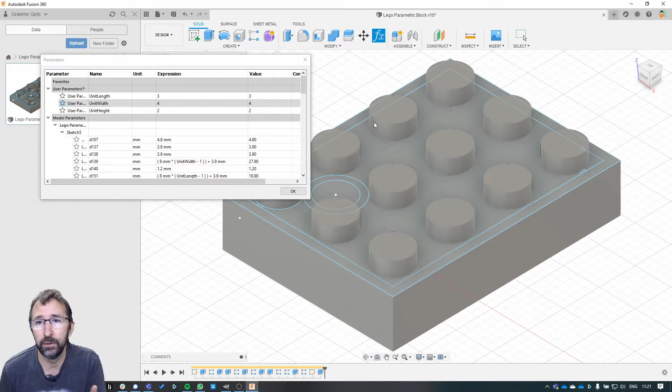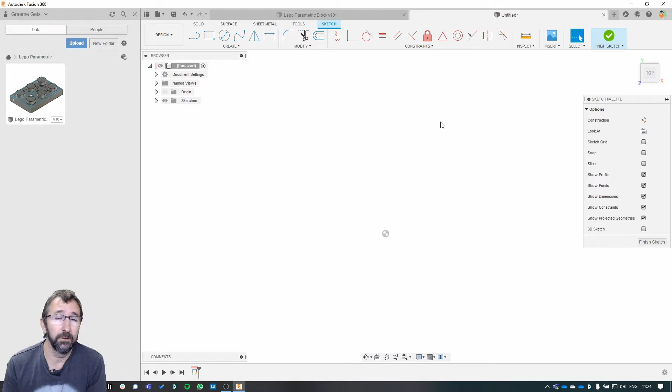So we'll start off with a new design, and as always, a sketch. So first, dimensions. I did some searching on the internet to see what dimensions people had done, and there's, as you can imagine, lots of them, some accurate, some not so accurate, some rounded up. But the one I liked the most, which was the easiest to work with, was this one by Christoph down in New Zealand. And he put together, also in Fusion 360, these drawings and dimensions.

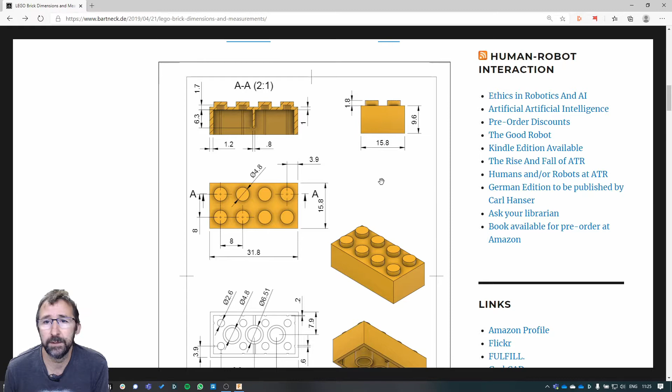So dimensions are fairly simple. We've got the stud at the top here is 1.8 mm. We've got a full-length brick at 9.6, and a platform, or at least a base, at 3.2, so a unit height is 3.2. We've got a dimension of 3.9 millimeters between the center of the stud and the edges of the wall, and 8 millimeters between studs.

If you notice here, the brick length is 15.8 and 31.8, and that 0.2 millimeter really is a 0.2 millimeter gap between bricks, so you've got to have that in. So what I learned largely about doing this one, which I'd failed in my original design, is how to do the dimensions so that when the brick grows, you still maintain that 0.2 millimeter gap between bricks.

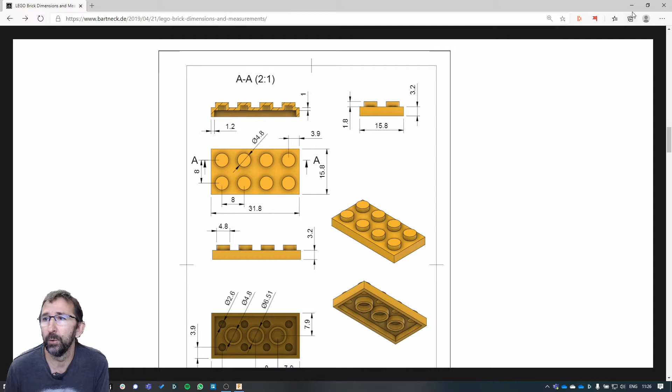And I found the best way to do that is to take one stud and anchor that in one place, and this wall and that wall, and anchor that, and everything else grows out from there, and the calculations work out. So let's go from there. We're going to start off with the stud. This stud over here is going to be my anchor, and it's a 4.8 millimeter diameter. So create a circle, 4.8 millimeter. Okay, first stud in place.

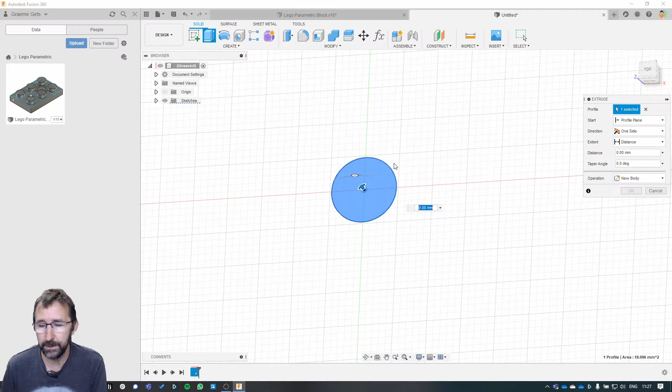So I'm going to start off with extruding that, and that is going to be 1.8 millimeter. And I'm just going to try and remember to name all these things so that I can refer back to them in the parametrics. Stud extrude. All right, so there's our first stud.

Now the next thing I'm going to do is set up the user parameters, and we only need 3. We need a unit length. It doesn't have a particular unit, it is a unit, and I'm going to design it as a 2x2 because it makes it a bit easier to work with. This is a unit. So by unit here, I'm talking about the number of studs in the block.

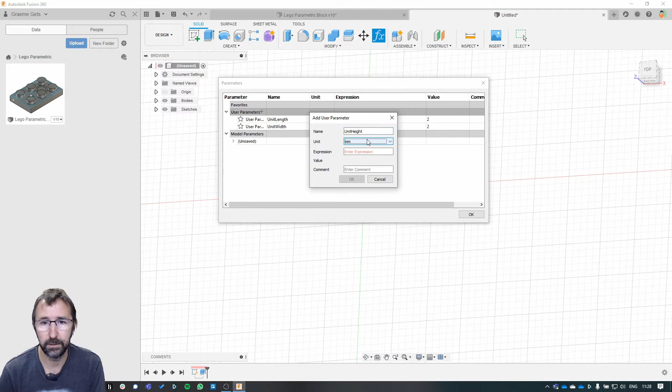To there. Unit height. Again, no units on that, and it is 1. Okay, so that gives us our start. So first thing to do then is to create the pattern.

Now I've got these pinned up here, but if they're not there on yours, if you go down to pattern, rectangular pattern, and then there's these three dots, which is the menu, and you can pin it to the toolbar. So I've done that for the pattern and the parametrics, just to make life a little bit easier.

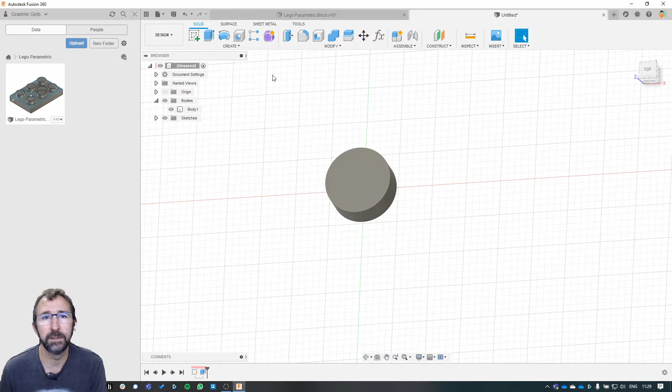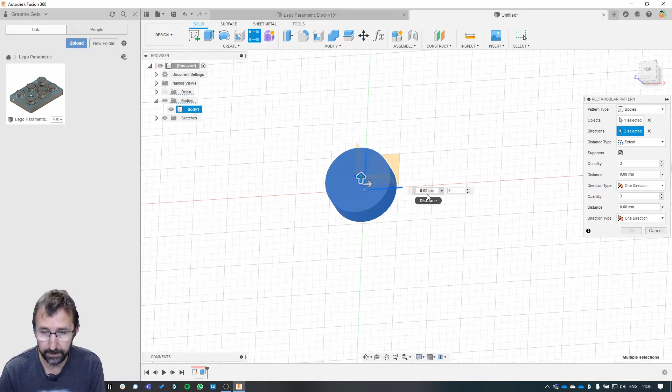So first thing, I'm going to do a body. That's the body I'm doing. Directions, I'm going to choose that orientation of the axis, and that way, and then we're doing up. So I know from the design that it's 8mm between studs, and this is going to be the unit width. The vertical line is going to be width, and the horizontal this way is going to be the length.

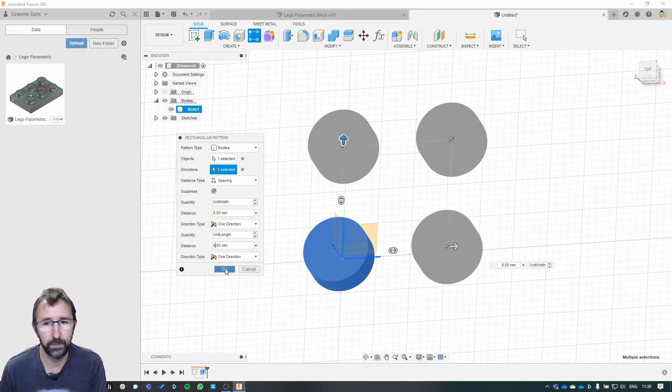Now, the distance type, this needs to be set to spacing because it's the 8mm spacing between the studs that we're concerned about here. And for the other way, it's going to be the same thing, but that is going to be the unit length. So you can see how it brings up the parameters that I've got in there as you type, which is quite useful. And 8mm for that as well. There we go. So that gives us our first part of the Lego block.

The next thing we need to do is the inside support, this bit here. So these are the bits underneath that the studs lock into. And again, this is pretty simple. It's a 6.51 diameter, inner diameter 4.8. Now, I generally make that a bit bigger to handle the shrinkage, especially with that small diameter, so that the studs actually do fit in. But generally, you don't really need that. It's this diameter, the 6.51, that's actually more important.

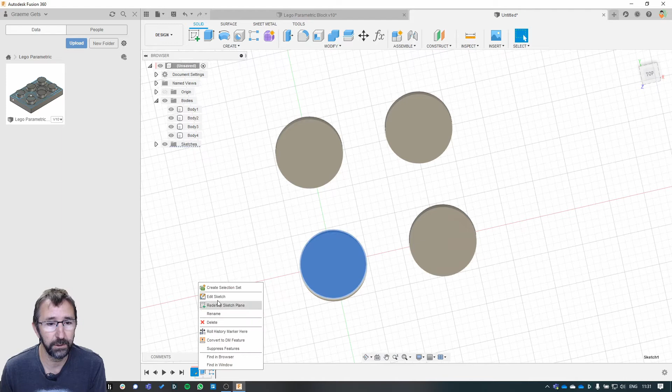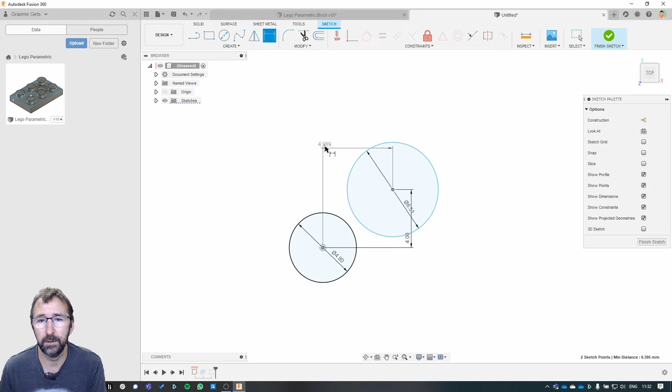So this becomes fairly easy as well. These are also 8mm between, and these are 8mm between. So if we're putting one of these in here, it's going to be half that, so that central point is going to be 4mm. Back to the sketch. Grab another circle, 6.51. And then we can put some dimension constraints in. So that was 4mm, and between there and there in that direction is 4mm. And that fits in nice and snug.

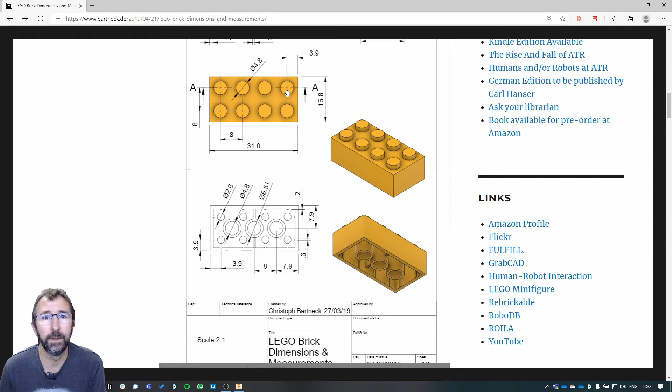Now, part of the anchoring: we've got this stud anchored to the origin, and this anchored to the stud. We now need to do the anchoring of the walls. As I said earlier, this wall here and this wall over here we're going to anchor to this stud. These ones here are the ones that are going to grow. So we go back to here. Our dimension between the center of the stud and the outside of the wall is 3.9mm. So between there and there, 3.9mm, and between there and there, 3.9mm.

Then the wall thickness is 1.2mm, so for that I'm going to do an offset, 1.2mm, and that will follow the design. Right, now we need to calculate the outside wall. It'll be the number of studs minus 1 plus this 3.9mm distance. And this 3.9 figure is important because you need a 0.2mm gap between bricks, 0.1 on one side and 0.1 on the other, and that's why this is 3.9 and not a straight 4.

So we put another dimension in there, and this we put in as a calculation. We want the unit length minus 1, multiplied by our 8mm spacing between studs. Keep the brackets in place so that everything stays right, and then add in 3.9mm. That 3.9mm is the other half, the dimension between the center of the stud and the wall. So hopefully that makes sense.

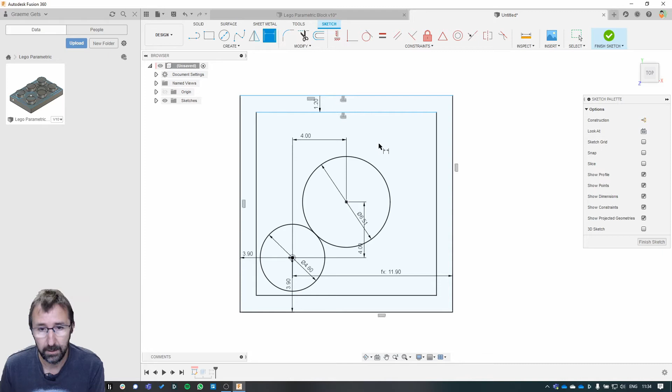And we do the same for this one, between there and the outside wall. Two brackets this time. Unit width minus 1 times 8mm minus 3.9. Oops, that definitely didn't work. What did I do wrong here?

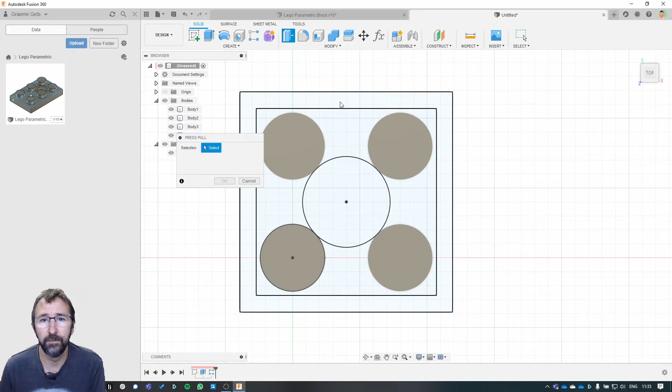That should be plus 3.9. There we go. So that looks about right. Yeah, we've got the dimensions in place. So the next thing to do is extrude it. So if I just switch the sketch on, Q for extrude. Now we're going to extrude downwards because that's the way we're going.

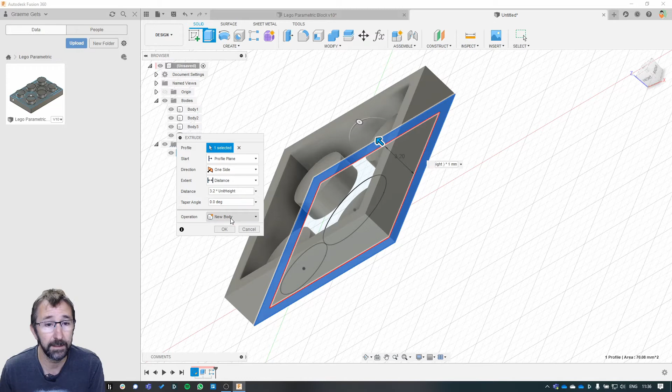And we're going to extrude. Because what did I do? I set the parameter as a 1 unit height. So we know 1 unit height is 3.2mm, so this is going to be 3.2mm multiplied by the unit height. No tapers or anything like that, and we do it as a new body. Hang on. That needs to be minus all of that to make it go down. Right, there we go. That looks a bit better.

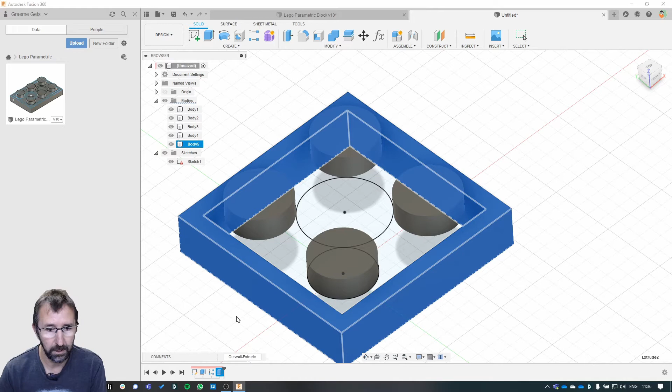Then we need to handle this inner part here. Let's rename this to outer wall extrude. Now back to the sketch, because we need the inner part of that. The inner diameter, where did we get to? Inner diameter was 4.8, but as I said, I'm going to make it a bit bigger just to handle this shrinkage. All the other dimensions I'm leaving exactly the same. I just know from printing this out that this needs to be a bit bigger. So I'm going to do that at 5mm.

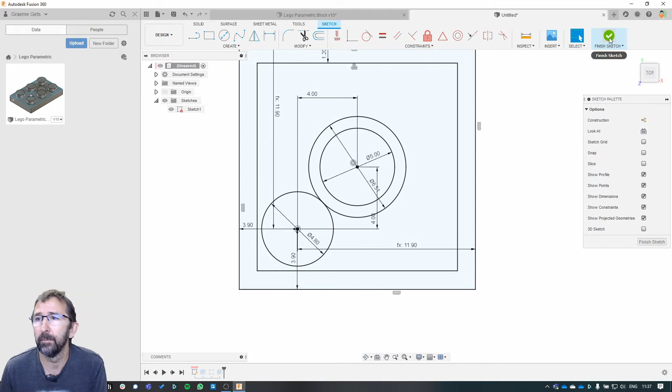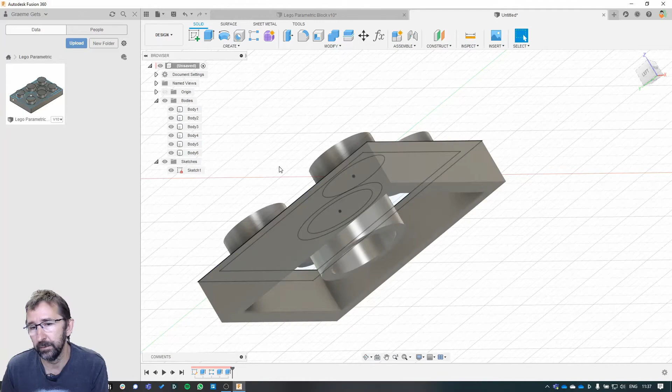Close that. Now we need to extrude it, and it's the same thing. Now I can put the formula in here as well. I can do it 1 times the unit height, or 3.2mm times the unit height. But in this case, I'm going to link it to the outside wall and do it as a new body. So every time the outside wall grows, these inside pillars will change as well. So that's looking pretty good.

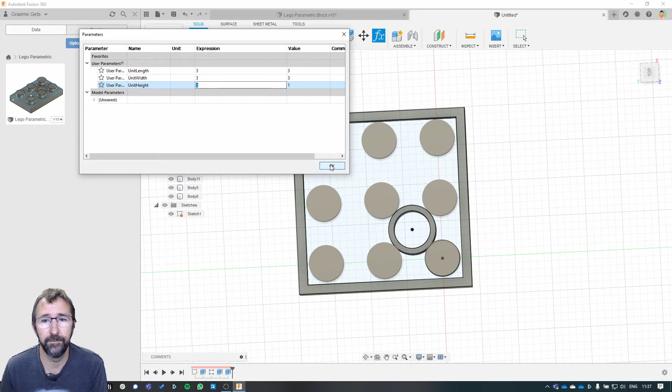Now the next thing we need to do is the pattern for this. And a quick test, always a good test. Let's change this to 3. That's looking good. 3 by 3, there we go. So what we're going to do is we're going to flip this over. Do we need to flip it over? Yeah, we can flip it over. There we go. Just so we're looking at it from the bottom. This is our anchor point now on this side because we flipped it.

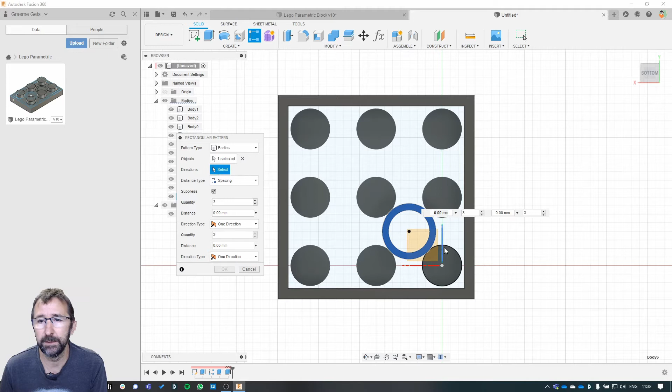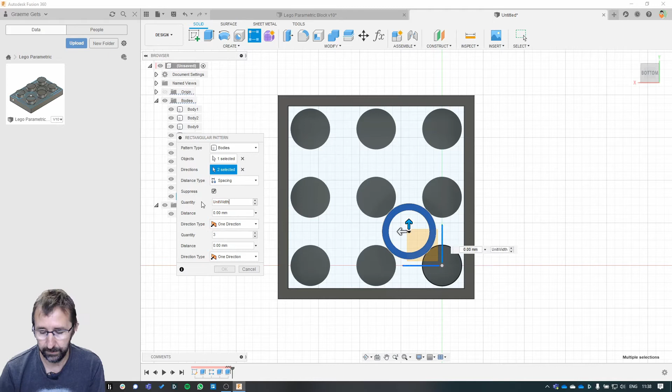And we're going to go into pattern. Again, we're going to select that body. Directions, we're going up and left in this case. It's a spacing. Quantity is going to be the number of studs minus 1 again, because we're going in between the studs, so that's going to be -1. So this is the width direction, so unit width -1, and it's 8mm, and this is going to be unit length -1 and 8mm. Okay, so that's all looking very good and nice and easy.

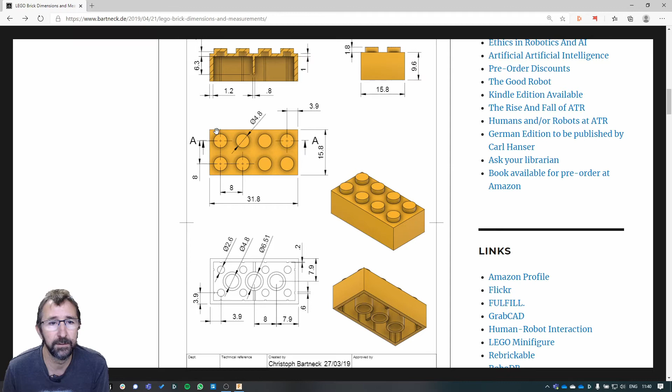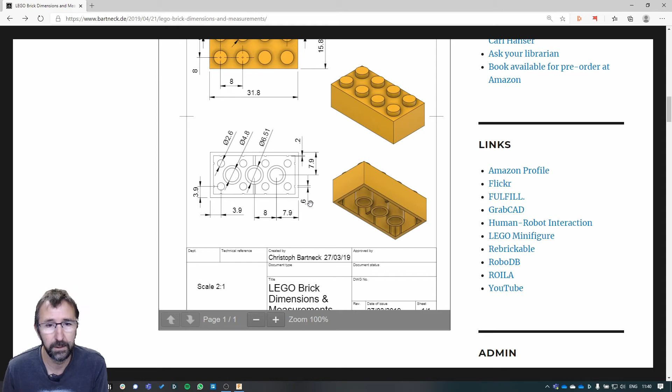The difference here with the pattern is that they only go along the inside of the outside wall, if that makes sense. Usually with a rectangular pattern, it'll do a whole rectangle. So for this one, we'll do 4 patterns for each part of the wall. And yeah. So back to the sketch. Let's turn.

Doesn't really matter, but just for my own sake. Right, so we're going to put in 2 of these. Now I'm doing this at 0.3 again, and 0.6. Again, just because this distance between here and here is actually 0.3, and it works well with the 3D print.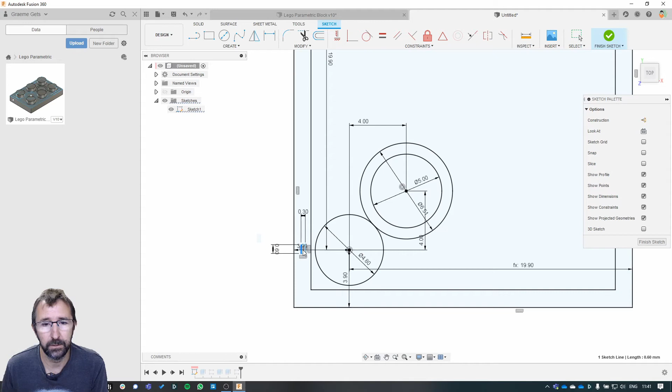So put that there. Now we can do a collinear between that one and that one, and then we need to set the dimension. So how to get this centered correctly on the midline of the stud? This is 0.6 millimeters. We know that this is 3.9 millimeters, so half of 0.6, which is the midpoint of this, minus that is 3.6. So the dimension between there and there is 3.6. There we are, and that's nicely in the middle.

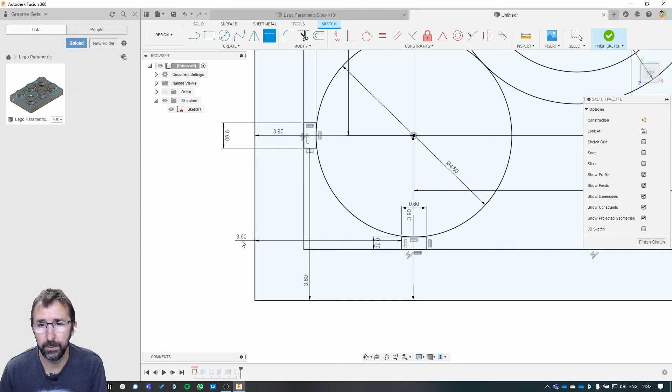Let's do this one. That is 0.3 and 0.6. Is that right? That looks a bit big. Collinear, no, that's fine. And dimension from there to there again is 3.6 millimeters. Okay, so then we will do this side. Now I'm going to do opposite corners. So we'll do a pattern to grow this one along that way and a pattern to grow that way, and then we'll anchor these bits on this side and we'll grow it that way and that way. That seems to work rather nicely.

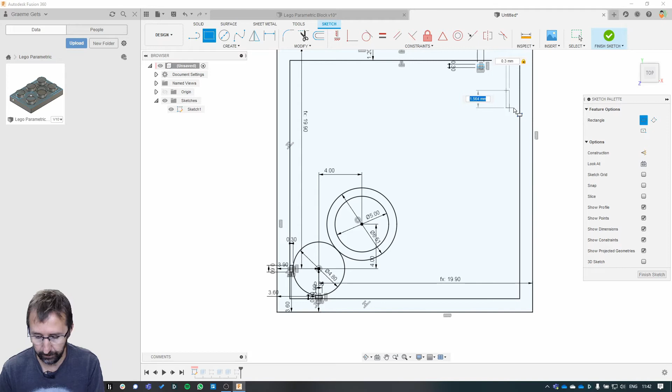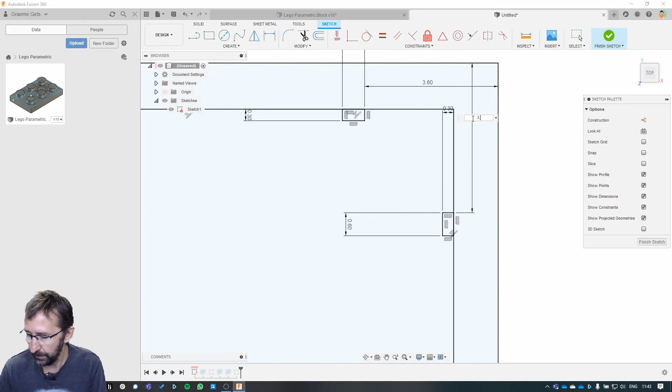So let's just put those in. It's going to be 0.6 and 0.3. Let's just put the other one in. That is going to be 0.3 and 0.6. Collinear between there and there. Collinear between there and there. And a dimension between that one and that one of 3.6. And between that one and that one of 3.6. There we go. That's that.

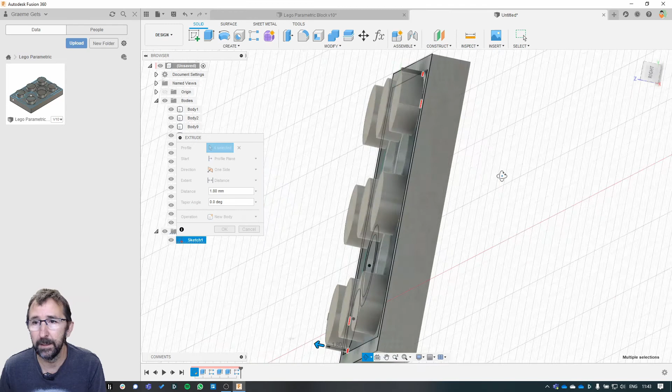Now we need to extrude them, and we can extrude them in one go. So E for extrude. We want that one, that one, that one, and that one. We've got 4. That's looking good. And again, I'm going to extrude them to link them to the bottom of that, and make sure you change this to new body, because if you join it then the pattern doesn't work. There we go. So we've got a whole lot of new bodies. You can see our bodies are growing. Excellent, that's looking good. So now to do the patterns, so let's do this from the bottom again.

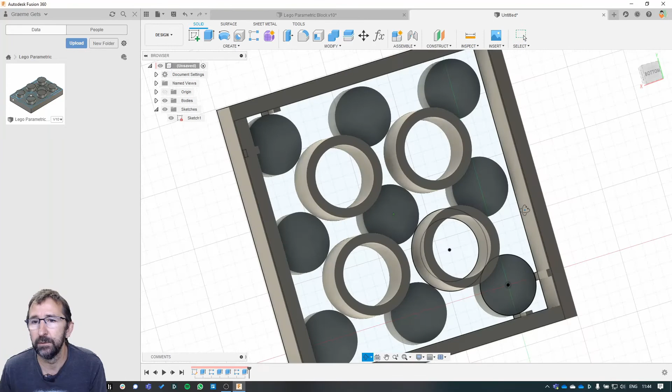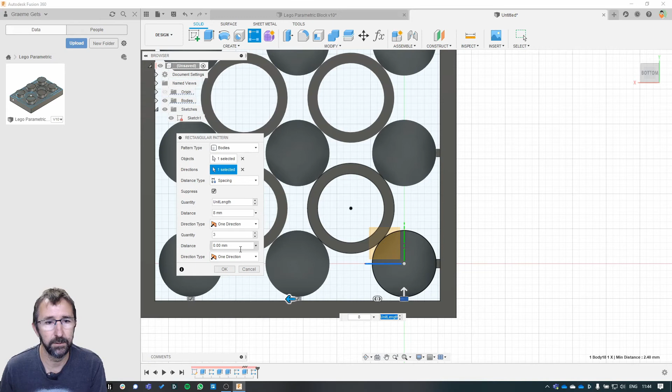And right, so we're just going to do one of them in one direction. So we're going to go up in this direction, and that is also going to be 8 millimeters spacing between the two, because again that's the stud spacing, and the quantity is going to be the number of studs. So in this case, units height, unit width. And this one going this direction. Choose a direction that way. 8 millimeters, units length. So there we go. That's those. So that's that side and that side done.

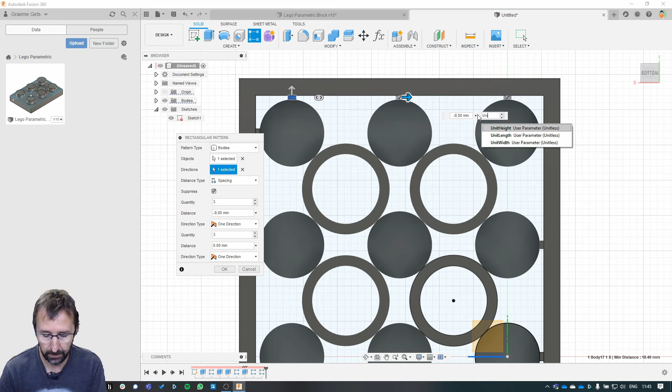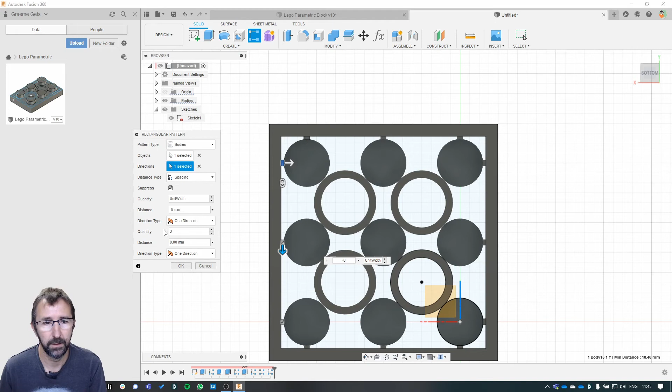Now let's do this side. That's that. Our direction is that way. Except this is now going to be minus, not 80, minus 8 millimeters, and this is going to be UnitLength again. And last one, there, and that is going to be, let's get our direction, that direction, and -8 millimeters with a unit width. There we go. That brings all that in. So that again is looking good.

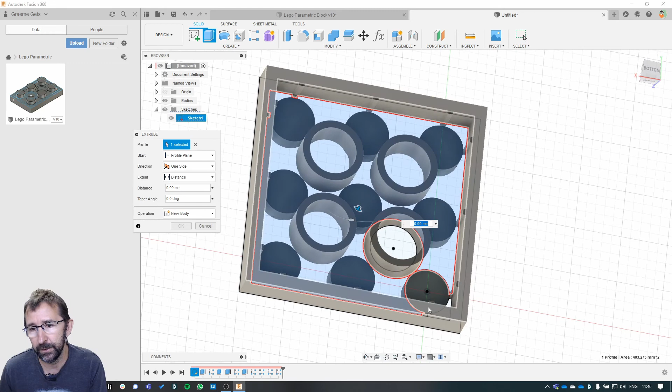The last thing we need to do is the floor, and the dimension of the floor is 1 millimeter. So we can do another extrude. We're going to grab that, and because these are the sketch parts, we need to add those bits in as well to make sure we get everything there. It's a new body, and the distance is going to be -1 millimeters because we're going down. We don't want to cut, we want to do a new body. There we are. And there's our Lego block. Nice and easy.

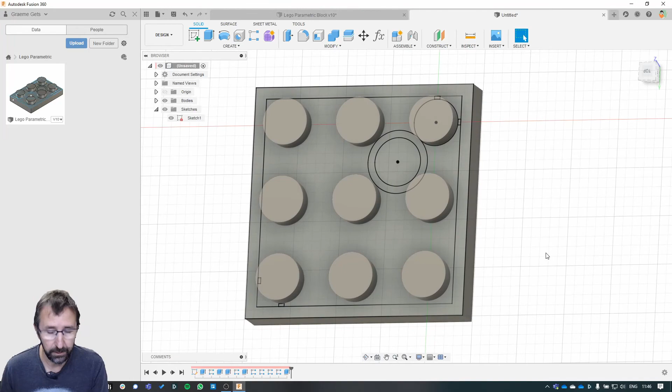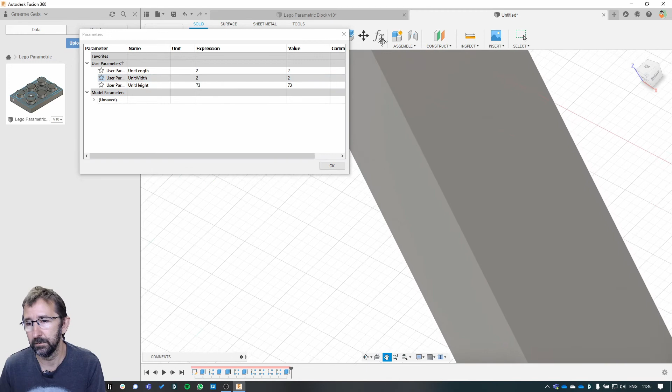Go back into the parametrics. It's changed. Well, let's test it. 2 by 2. That's looking good. 2 Lego units, 3 Lego units, 7 Lego units. There we go. That's quite a Lego unit. Oh, 73 Lego units. I thought that was a bit big. 7 Lego units. There we go. That makes more sense. There we go. So that's working very well.

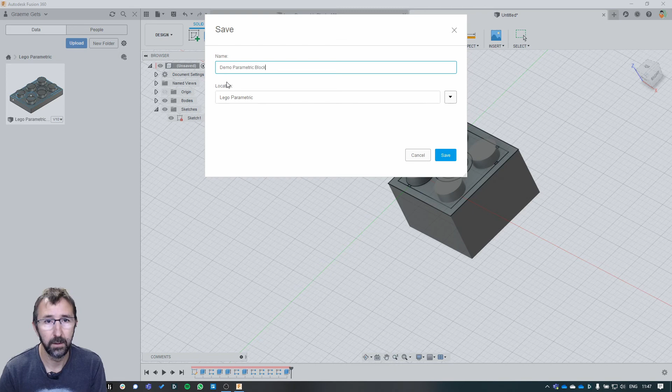Now, let's just save that design. So, demo parametric block. So this is where the beauty of this comes in. So let's say I need to make a custom plate for a PCB board. I need to make the space and set the dimensions to the right size. And so we can do that now. Create a new file. Let's just call this demo. So I can take my design that I've just done and drop it in there.

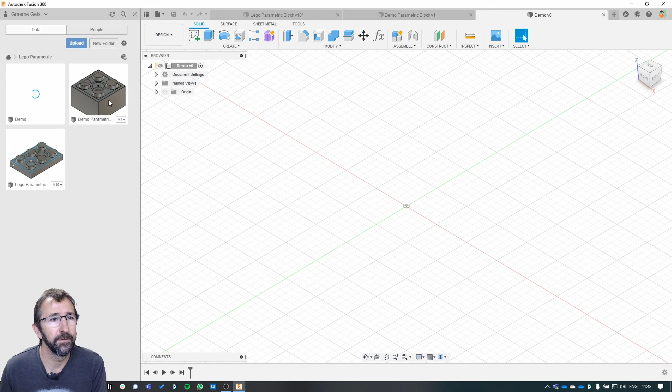And if we go into the parametrics here, you'll see there are no user parameters. And the reason for that is that it is still linked. So you have to unlink or break the link between the two in order for that to come across, because the parameters are in the original design, this demo design that we've just done here. So we've got to break that link. So just right click there, break link, and now they're separate.

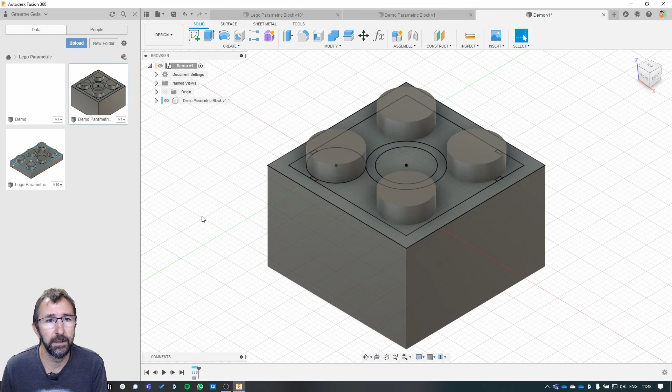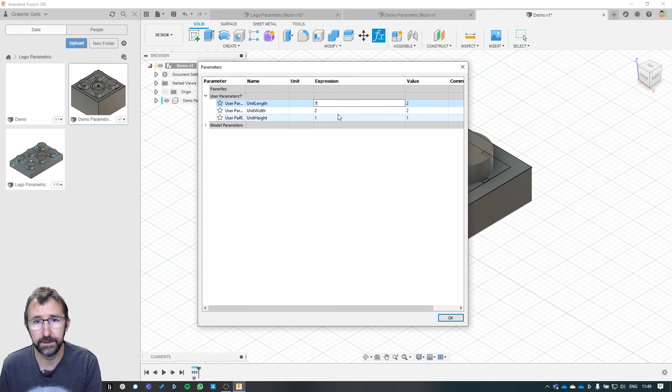And if you go into here, there are all our parameters and there's all the dimensions that we put in. So just for ease of use, I'm going to put that back to 1. And let's make this a 7 by 8 for argument's sake. So just as a demo, that gives us the size board we want.

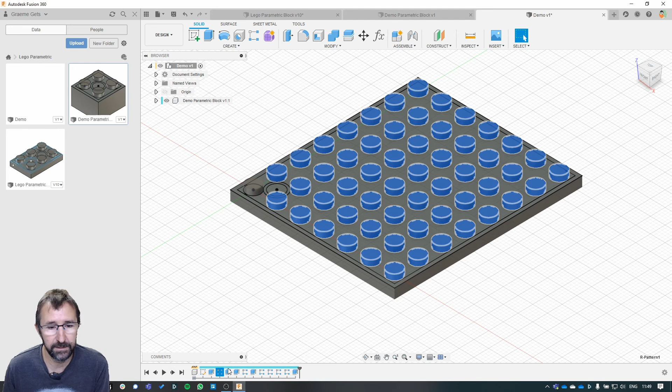So if we're going to put a PCB board onto this, we want to get rid of some of these studs. You might want to put a cooling hole in or something to that effect, but we need to be able to control these. So if you go down to the group here, there's all the patterns that we put in earlier. So the first one is our studs, and that's the one we want to target for the top, edit feature. And you see they all got a tick box.

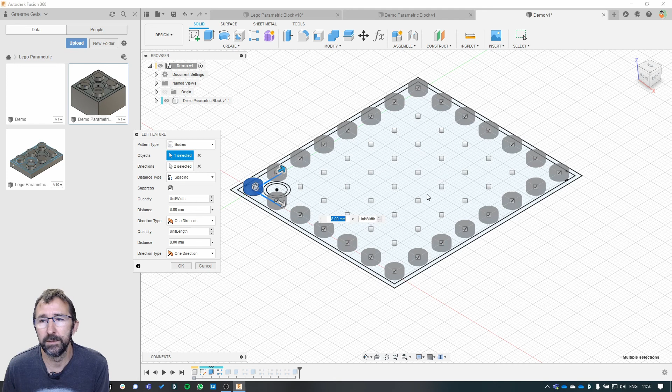So you can go through now and just take out the studs that we don't need. There we are. So those are all gone. And that gives us a nice clean board, and then we can go and design whatever we want on it.

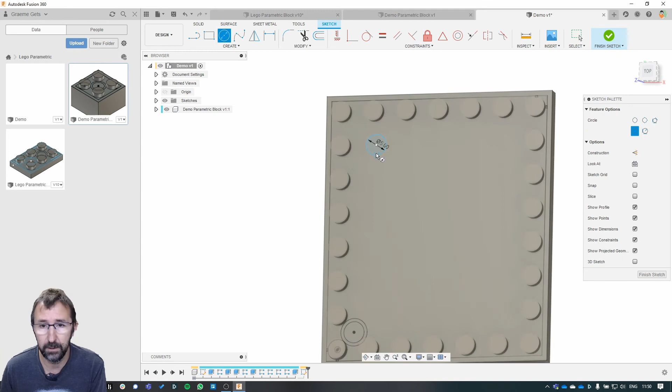So let's go and grab a new sketch. Let's put some studs here for the PCB board. Again, this is just a demo, so I'm not doing this accurately. But let's say we want a 5mm standoff with a 2mm screw hole. Extrude that, not that one. Extrude that up for 5mm standoff.

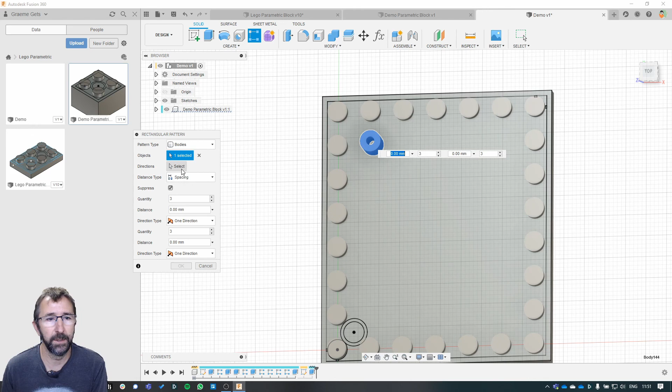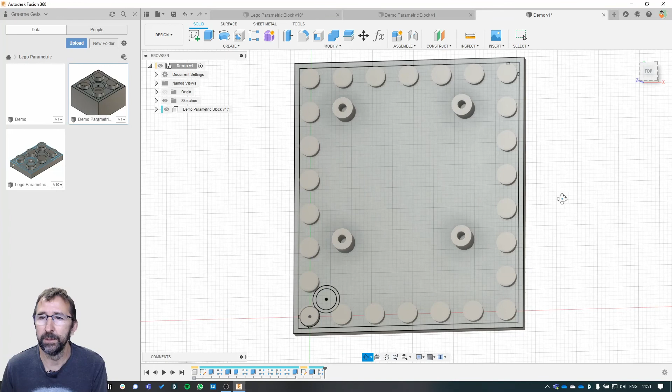Create another pattern. Select that body. We can do spacing, directions that way and that way. We want 2 and 2, and again, this is just a demo, so I'm not doing anything specific sizes here. Let's do that. So there we've got a standoff for a small PCB board, and then maybe we need something else in there.

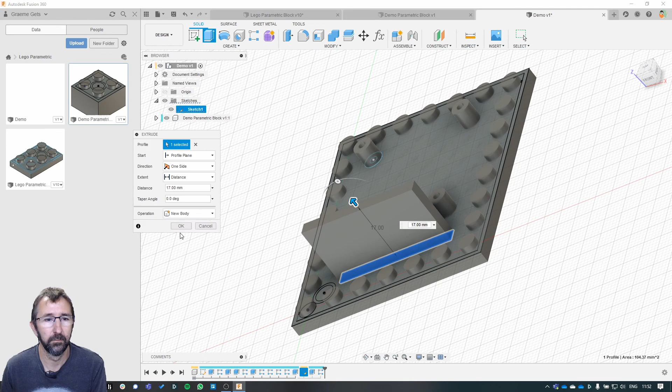Maybe we need something else, I don't know. There we go. So whatever you want to do, that's the general idea. So I found this very useful. It's made it a lot easier for me to just quickly put together a board or custom Lego piece.

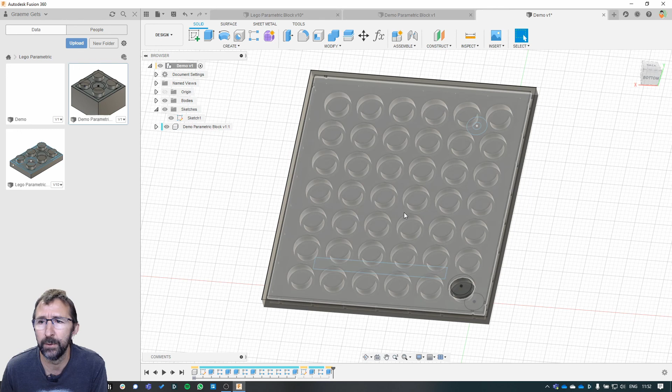I find with the 3D printing, you don't need to do supports. If you've got all of these columns in here, you don't need to do supports. It'll bridge these quite happily, especially with PLA. It works very, very well. If you went into these patterns and took some of these out, maybe you wanted a cooling hole or you needed a space there, then you probably would need to do supports, or you could just do supports in this particular area. So that is it.

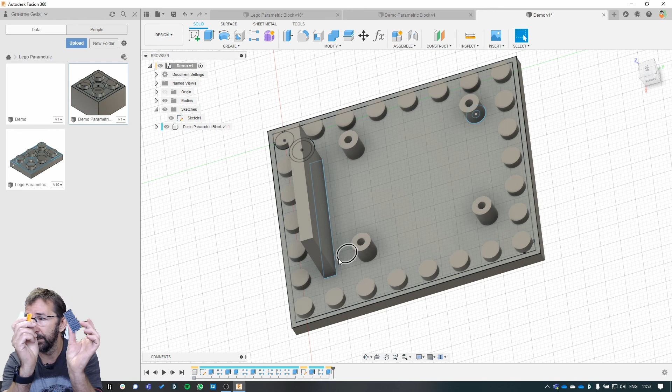Let's put those back. And there we go. So I hope you enjoyed that. I think this is a very useful way of doing a parametric Lego block. Hopefully you can use it in your own designs. It's very, very easy to put together if you follow what I've done here. As I say, they print out really well. I've tested them out on bits of Lego, and I'm very happy with the way that they fit together and press together.

So thanks to Christoph as well, who put these dimensions together, which have been really, really useful. So go and visit his site. It looks like he's got some interesting things there.

So I hope you enjoyed this video and found it informative. I think that the parametrics in Fusion 360 is really, really powerful. The ability to create a base object and then change it just with a few parameters is absolutely wonderful. I've 3D printed these. As I say, they work very well. So it's all good, I think.